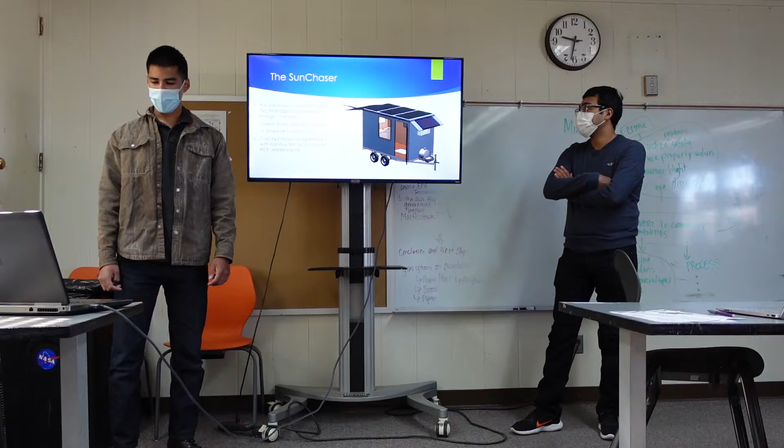Sure. Okay, so as Dr. Ghosh alluded to, 2 summers ago Dr. Ghosh put me in charge of the SunChaser project. So I took it from him and started coming up with the design with the help of some other interns, 2 of whom are here, Frank Maldonado and Yazbeth. And this last summer they were here to help me with finalizing the design of the SunChaser. So I'll talk a bit about that, and then we'll also talk about how we handed it off to Brad and ACE High School and how they're actually going to be making it.

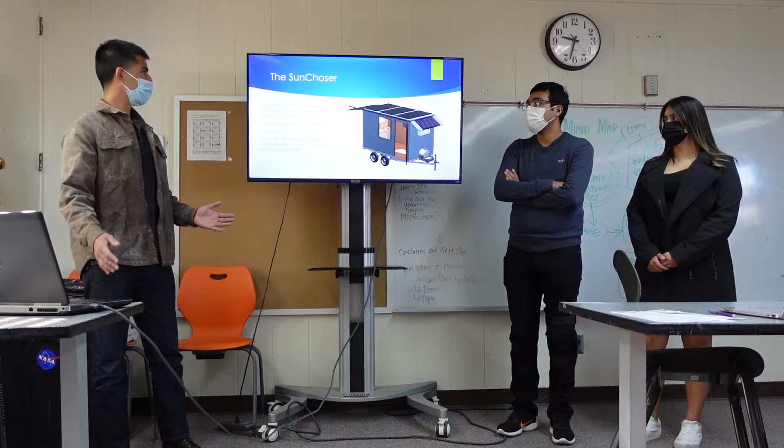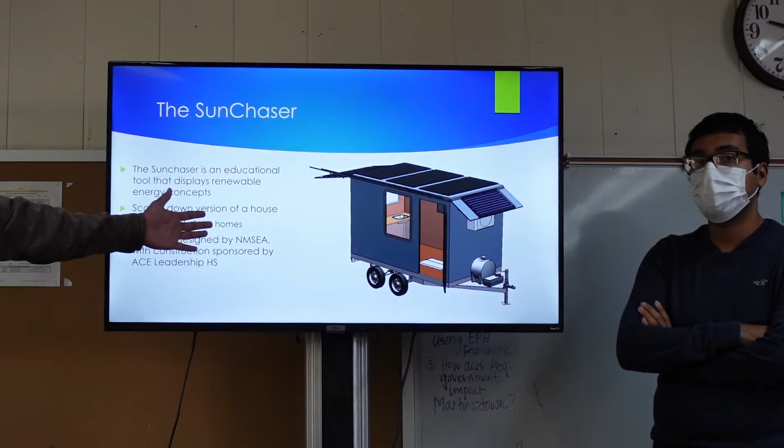So based off of what Dr. Ghosh said, the SunChaser is an educational tool, a mobile educational tool specifically. It's built off of a trailer, meant to be a scaled down home so that we can drive it to different schools and different places across New Mexico and the US, so we can display a variety of renewable energy methods, which you can see in the next section. So this here is a rendering of the solid model, as we call it, that I made on the computer to show the design that we were trying to make. And then in a bit you'll see the physical mock-up that ACE has been making.

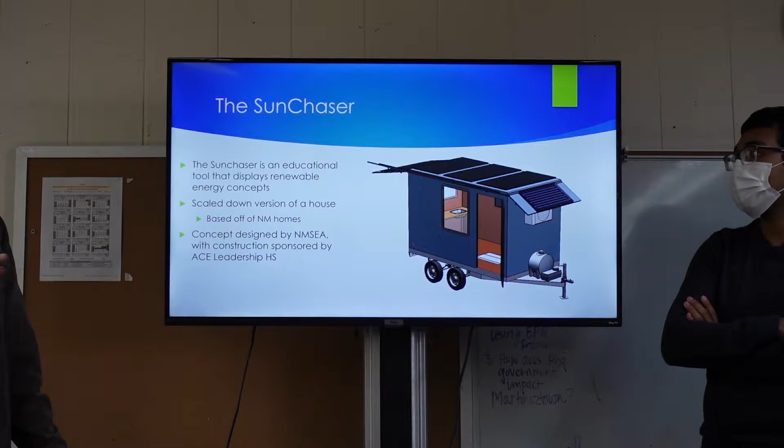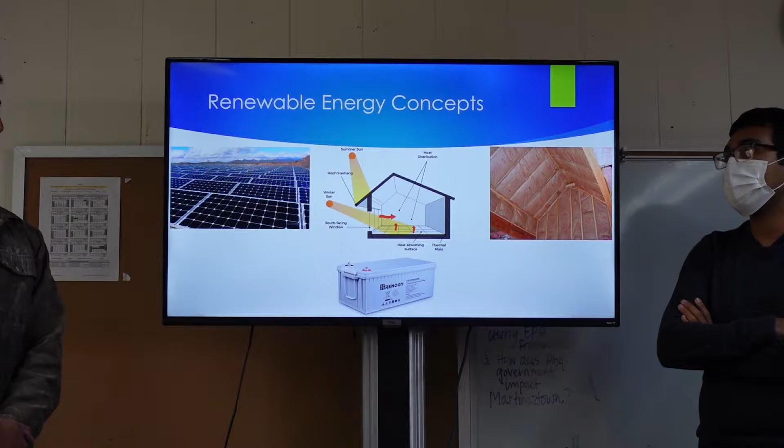So in terms of renewable energy concepts, there's a variety, but what's most prevalent for New Mexico really, and what we have over many states, is that we have an abundance of sunlight. So one of the main things we're focusing on is active and passive solar energy. Active being things like your photovoltaics, your solar panels, and your battery systems, where you're actively generating electricity. I'll talk about more of that in a moment.

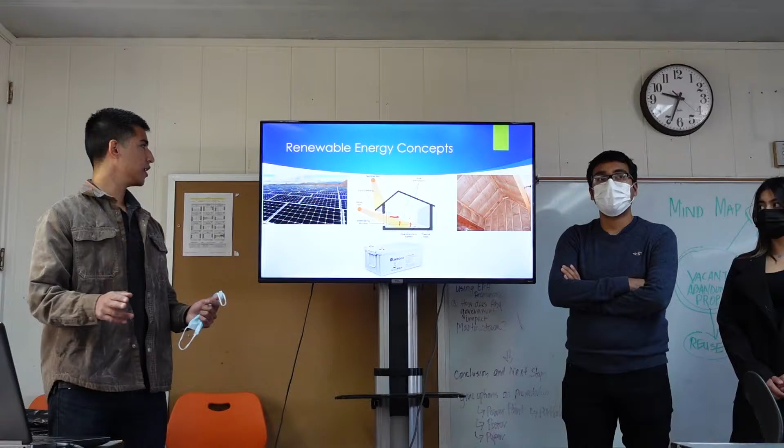And then passive solar architectures, where you utilize things like awnings and windows to allow sunlight in or block it from being inside the structure to heat or cool your building. So I'll talk about that here in a bit. In terms of the SunChaser itself, we designed it in a manner of having a variety of subsystems is how we looked at it. We called them subsystems.

So first there was the trailer platform, and that's what we're actually building off of. We could build from scratch or we could start with a box trailer. I'll talk about all these in further detail in a moment. Second is insulation. That's one of those things that's forgotten very often in renewable energy things, because it's easy to forget that you can generate all this electricity, but if you don't have good insulation, it all goes out the walls, out the doors, out the roof. So it doesn't help much.

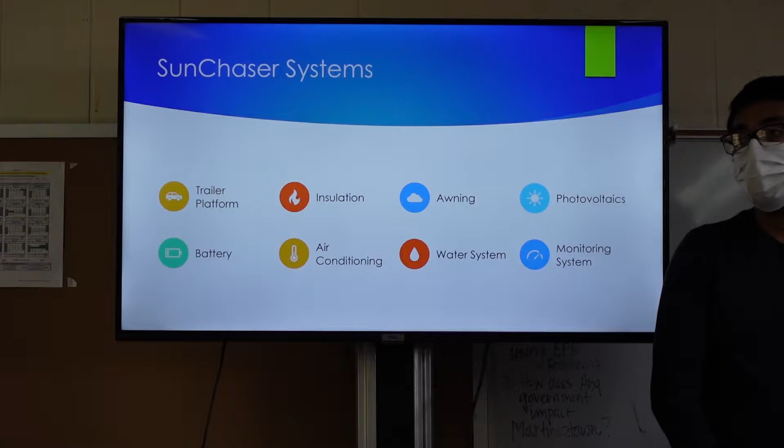Then there's the Awning Subsystem, which is part of that passive solar architecture. Photovoltaics I discussed, batteries, that's active solar, air conditioning, water. Air conditioning, that's one of the major draws for homes; the air conditioning always takes the most power usage. So we had to include that for a scale model.

Then we have a very interesting water system that I'll go into some detail with. And lastly, a monitoring system for effectively making the whole SunChaser a smart system. So it'll be very interesting. We'll talk about that here momentarily.

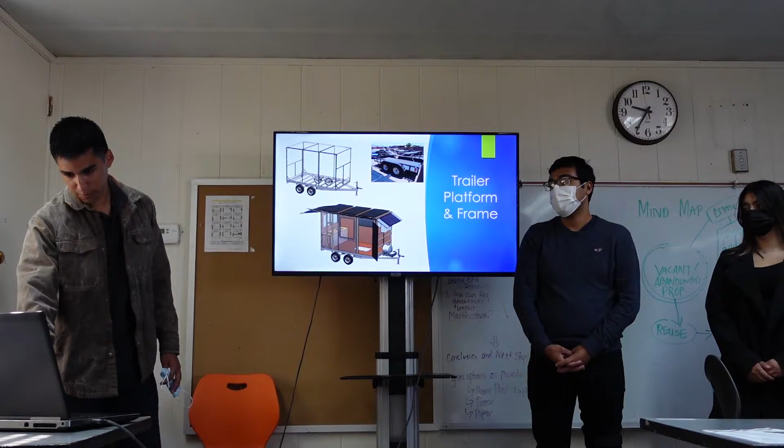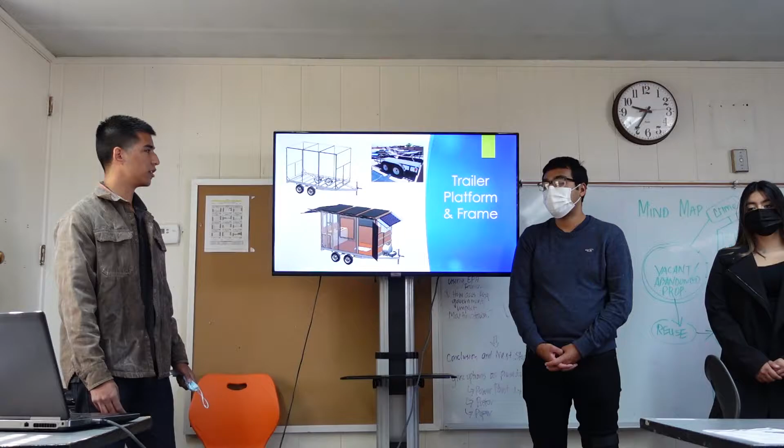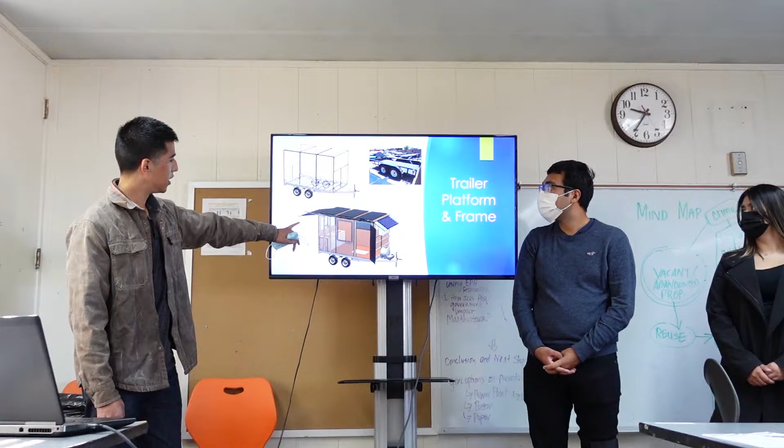So in terms of the platform, and you'll see more of this when we go outside with ACE, we started off with a flatbed trailer and essentially decided that we will build an enclosure off of that, because starting with a box trailer would be a bit hard to adapt in some ways. So you can see here the steel subframe we designed, as well as this view of the inside of the trailer, where you can see some of the wood framing we have there as well for the walls. Very similar to a house is how we designed it. Of course, on a much smaller scale, but that's essentially what we have.

And then you can see the interior, and it's meant to be just like a home. We have our sink and our air conditioning, and then TV, and we'll have other appliances not shown because I didn't model everything, but that's most of it.

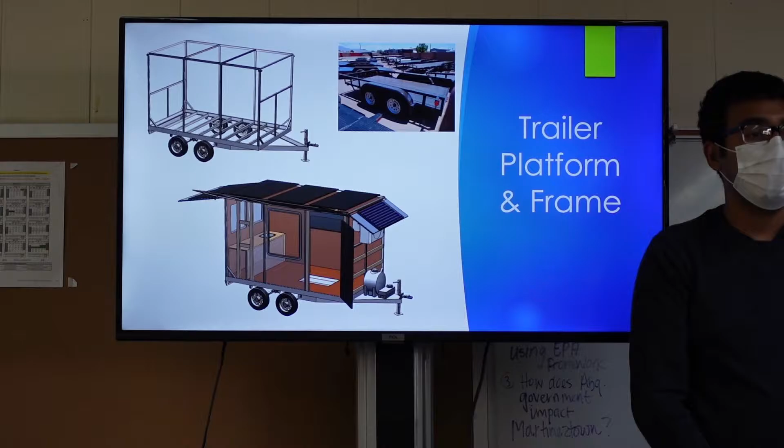So the trailer was, of course, the starting point, so we had to get a good trailer. We were stuck with having to work on what we could physically pull. The old SunChaser was unbalanced and heavy, so hardly any vehicles outside of like a 1-ton truck could pull it. So this is meant to be much lighter and easier to pull, to the point that you could pull it with a Highlander if need be. It shouldn't be much of an issue. Next, Frank will talk about insulation. This was one of the subsystems he was finalizing in his time this summer.

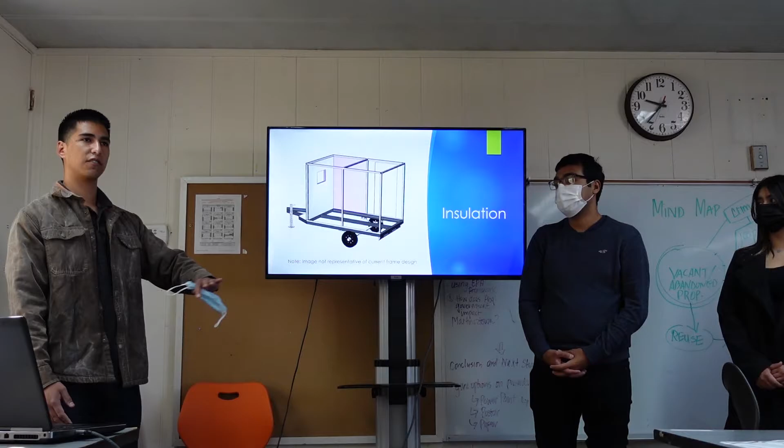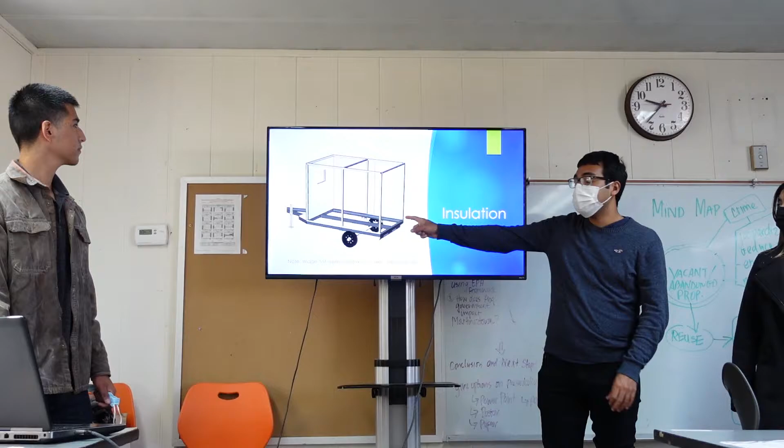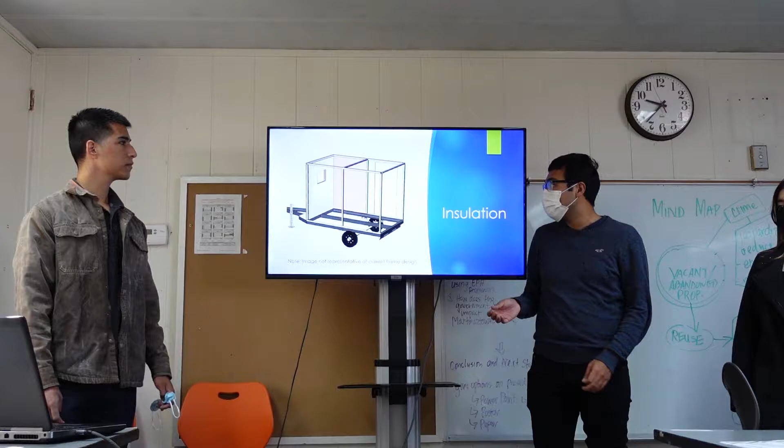So as Gabriel mentioned, insulation is actually one of the most important parts of the SunChaser, especially because these walls are only 1.5 inches thick, and because of that thickness, it allows for more heat transfer through conduction. And so for this wall thickness, we need about an R7 to R9 insulation value. And foam board is actually perfect for that because it has those R values at those thicknesses. And there's also a few more considerations we have to make.

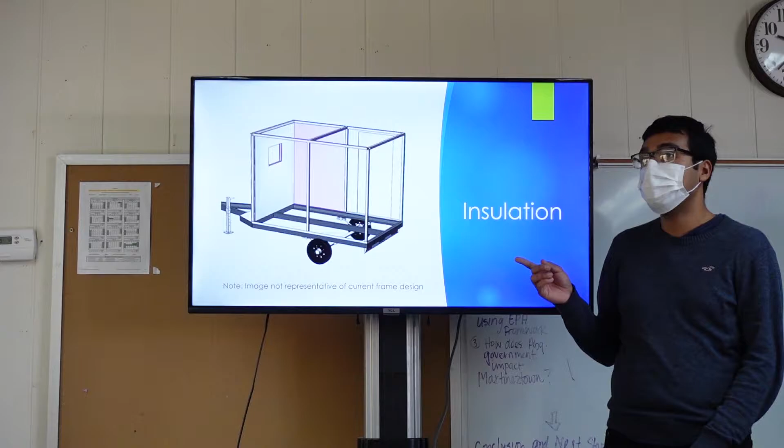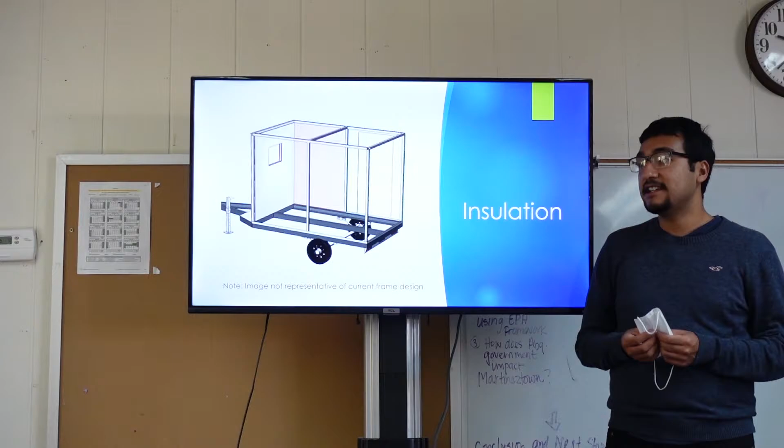The outside of the SunChaser will be aluminum, which is highly conductive, about 200 watts per meter Kelvin. So that will be transferring a lot of heat in the cold and in the heat. And also, the interior of the SunChaser is plywood, and that is, I guess you could consider it an insulator, as it has a conductive value of 0.12 watts per meter Kelvin. Next slide.

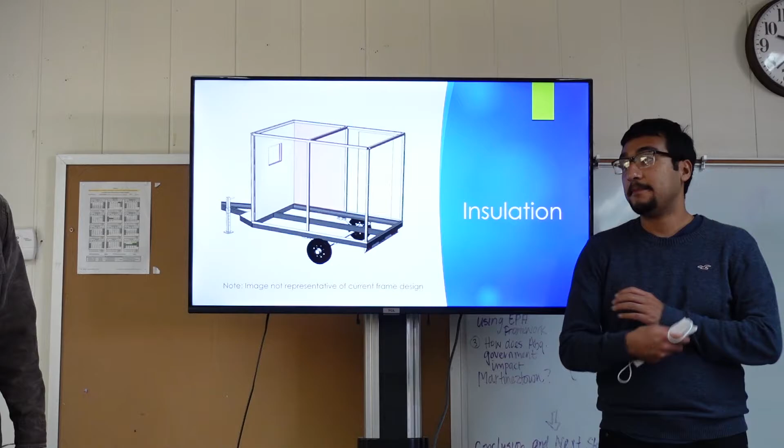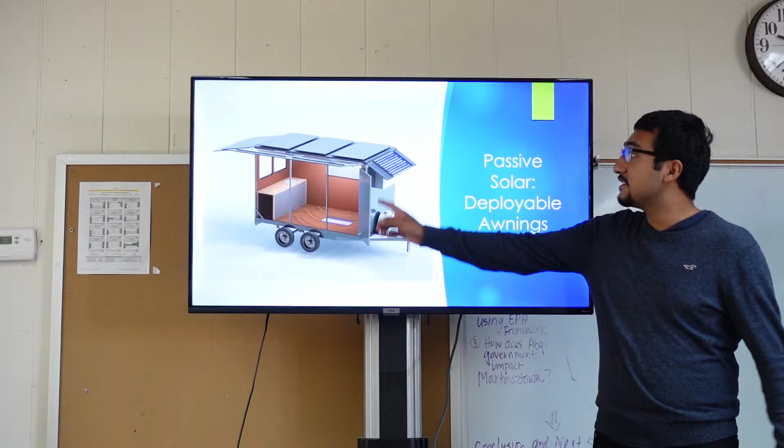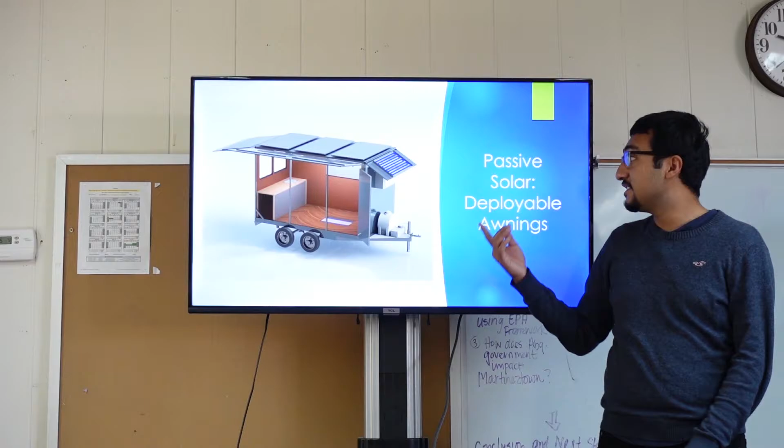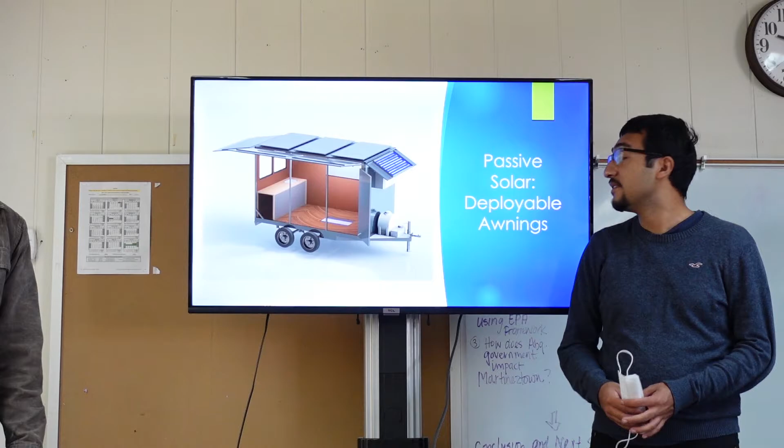Okay. Yeah, and as Gabriel mentioned, we will have these deployable awnings, and these are not only for shade, but also they will hold some solar panels. So this front awning will actually hold 2 solar panels, and the back one will hold 1 solar panel. And these will be completely controlled by linear actuators, so their position can be completely controlled. And the smart systems that Beth is working on will help track the sun so that the solar panels are in the required position for maximum production of power.

Next slide. Then a little bit more specific into the awning frames. This is the larger awning on the side of the door. It is made by 1 inch by 1 inch by 14 gauge, which is 83 thousandths of an inch steel. And so one of the design considerations we wanted to make is that we wanted to include a factor of safety of 1.5. And this awning should hold about 120 pounds; with a factor of safety that is 180 pounds. And that is what I have modeled here.

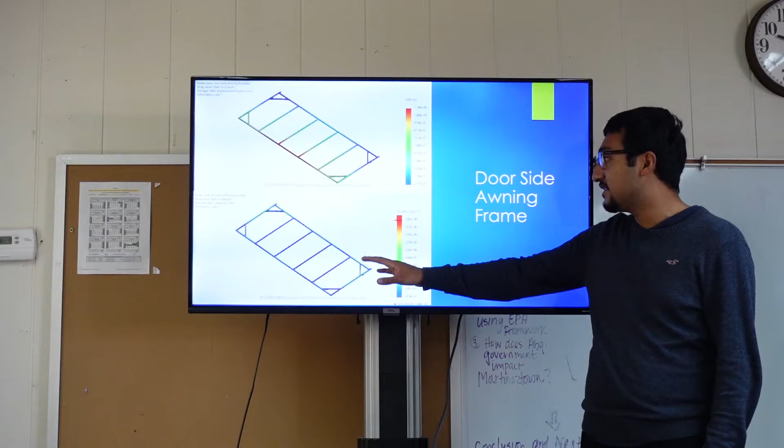And so if you see the maximum displacement at the edge here is about 1 inch, which is relatively small, and there's also no yielding. You'll notice that there is a little bit of yellow, but it is mostly blue, signifying that there is no yielding at all, that this frame should work perfectly under the loads.

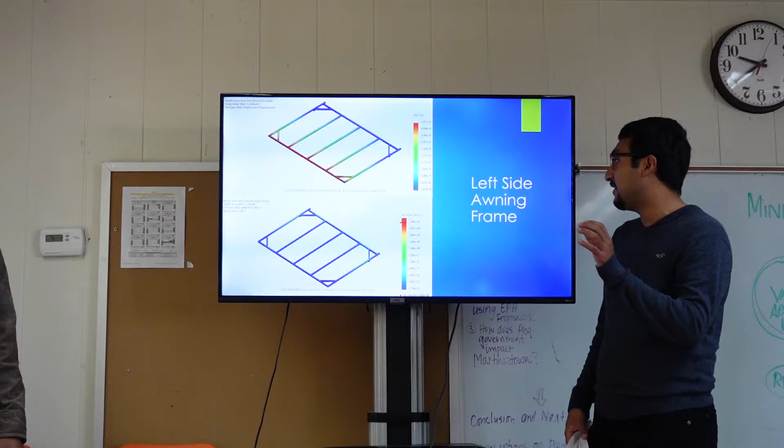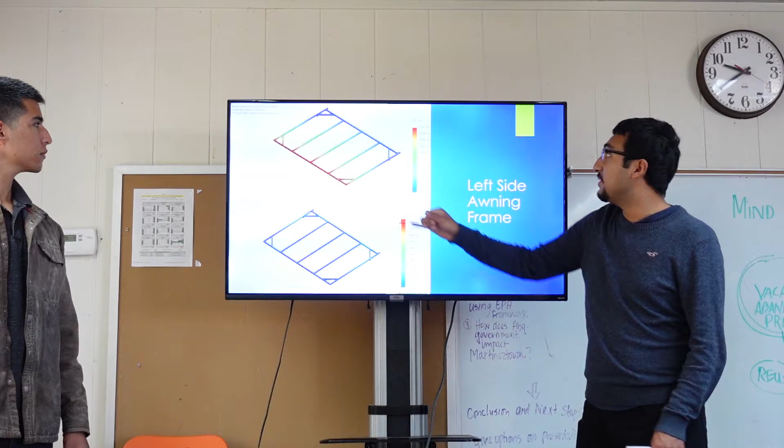Then here we have the left side awning, and this one will actually hold one solar panel, which is about 60 pounds. So with the factor of safety, it'll be around 90 pounds. And so here we see a similar displacement at the edge of the awning frame, but this time it's around half. It's about half an inch. And once again, there is no yielding. It's a relatively cool plot here, and it should be able to sustain that load. But now Gabriel's up next.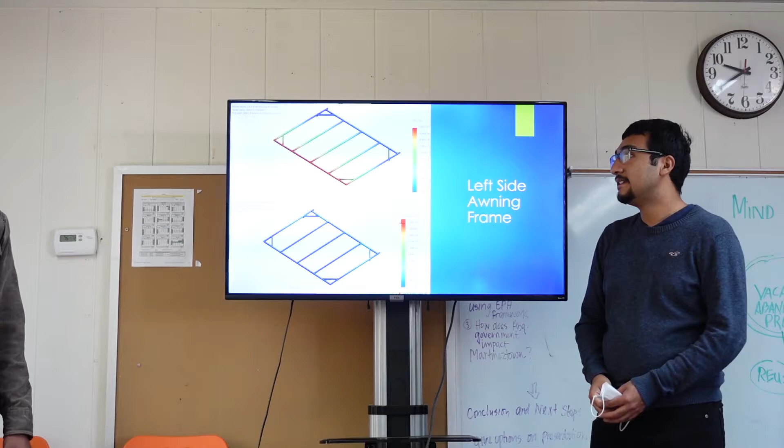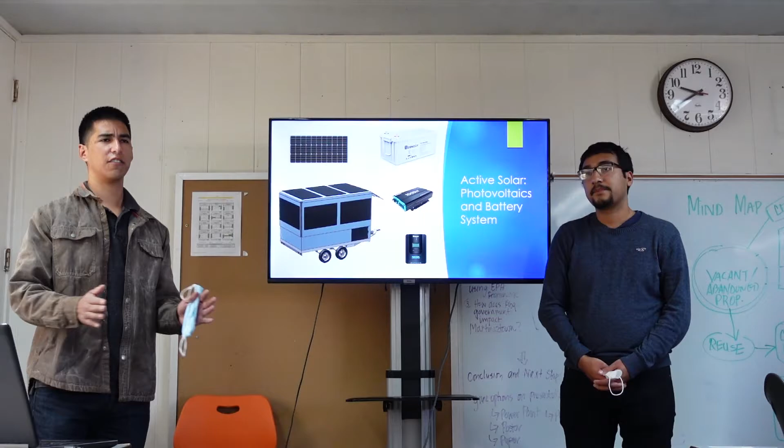So with that, as Frank alluded to, we have designed the SunChaser from the ground up to be able to fit all these solar panels and to do so in as efficient of a manner as we can. It's something that is beneficial for houses, but sometimes if you're not building your house completely, it'll be hard to get that many solar panels. But what we wanted to do was kind of show the best we could possibly do in that respect.

So you can see here the SunChaser model has the awnings folded down. So the awnings are great, and I'll talk about that here actually. When they're folded down, that's when we're in travel mode or storage mode for the trailer, for the SunChaser. And then when it's time we take it to, say, a school to present, we'll hit a button, as Frank alluded to, and the awnings will pop up with the linear actuators.

Or if we hit a different button, we'll start the sun tracking mode, as Frank talked about, where the awnings that are on the trailer will be able to track the sun. And Yasbeth will go into that momentarily. That's what she's been working on. Overall, photovoltaic systems have been fairly simple for the last 30, 40 years. Generally, you have what's called your photovoltaics panel, which is your solar panel, as everyone knows it by. And that is what takes the sunlight and makes it into electricity for us.

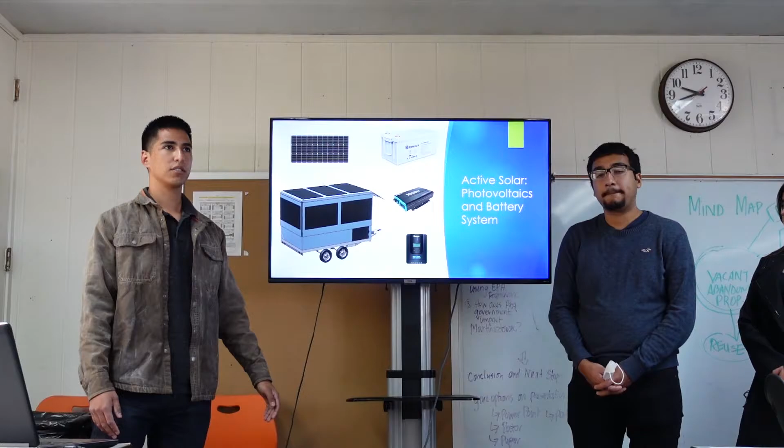That goes through what's generally called a charge controller. It basically takes that electrical output from the panels and makes it something that the battery system can digest more easily. So that electricity goes to the charge controller, to your battery bank, and your battery bank is where you hold all your energy. So the battery bank is what we plug everything into. And we say you can attach an inverter, because the battery bank is in DC power, and if you need AC like your house, then you need an inverter to convert that to AC. So that's about what we have for that.

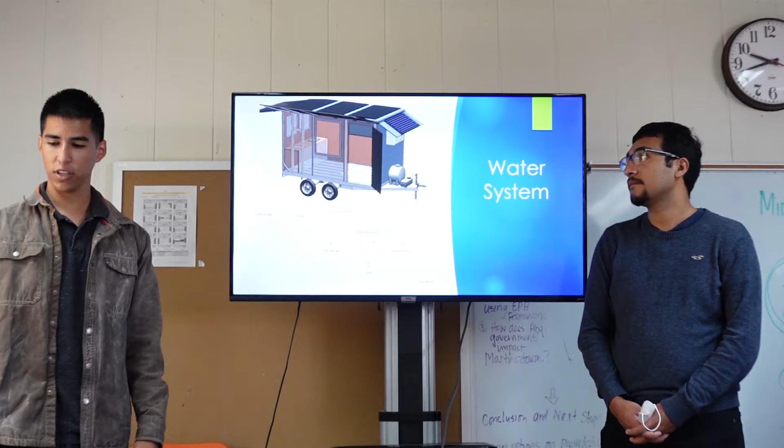In terms of the water system, this is one of my favorite systems actually, because it's one of the most involved, I suppose. Essentially what we're having is we have this panel up here, which is meant to represent a solar water heater. So we have a way to heat water and have hot water on board the SunChaser. And actually we have a diagram of the general plumbing flow chart that explains it a bit better than I might be able to.

But essentially what we're doing is, dependent on the temperature outside, we want to be able to use that hot water to also heat or not heat the inside of the trailer. So we have a radiant floor system that will be doing that. So dependent on the temperature, also part of the smart subsystems, which we'll talk about, we'll be able to divert water to be stored either in the exterior storage tanks or in the radiant floors.

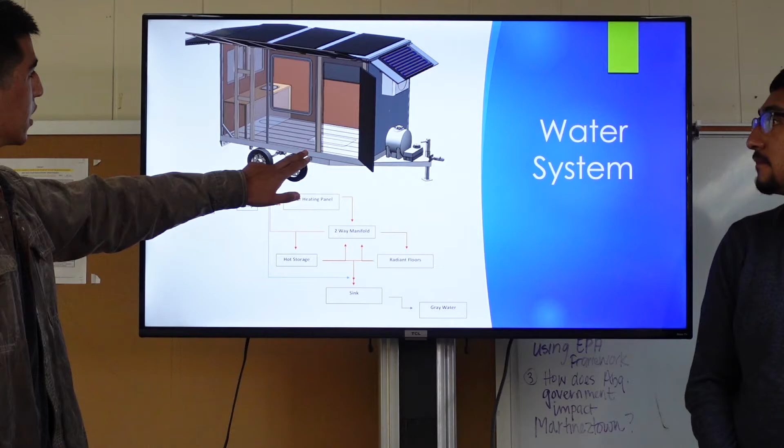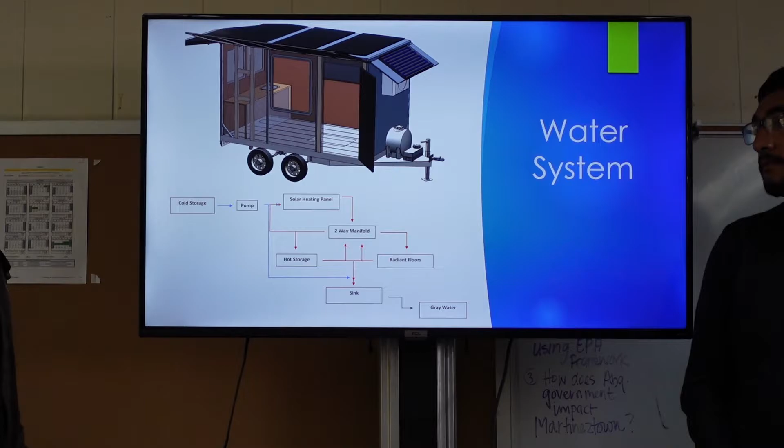Then when it comes time to actually using that water for washing your hands or whatever it may be, it'll go towards the sink and you can use that hot water. So that's a very interesting system. That leads me into what Yasbeth can talk about.

Yes, so my name is Yasbeth, and as Gabriel has mentioned prior in the presentation, the goal is to make the SunChaser a smart system. We have recently started working on actually creating these subsystems, and we have broken it down into 3 main groups for now. The first being the awnings, which is coding and making a small-scale model of the linear actuators that are going to be moving the awnings to whatever position we'd like, whether we want it to be completely flat down for travel mode, maybe 45 degrees or 90 degrees up.

We also have the solar tracking group, which is the portion where the solar panels will adjust to whatever angle the sun is hitting it the most. That way it can convert the most energy and bring it into the SunChaser to use for other purposes. And then the last subsystem that we're going to work on for now is the cooling and heating system, which Gabriel just finished talking about.

The main goal for now is to create small-scale models, work on the coding, and make sure it's working. That way, when it comes time to transition into actually implementing these subsystems into the SunChaser, it's just a matter of editing the coding here and there, and that way we can troubleshoot everything and make sure it works. Slide.

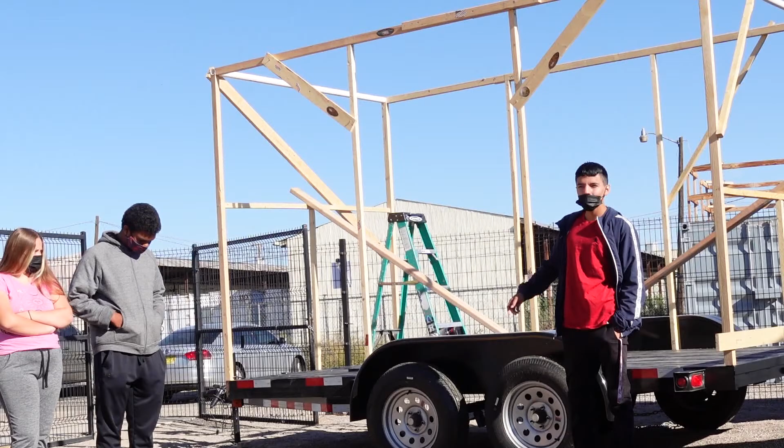Right now you see a wooden mock-up. I want one of our students, Samuel, to talk about that. Why are we doing this? Hello, my name is Samuel Cabrera. I'm a student at Ace Leadership, and this is a mock-up of the NMSEA trailer, our solar energy trailer. And we did a mock-up because it helps us practice our measurements, practice our building, and practice with the solar energy and how it's gonna look.

And also, we have a couple of braces to help the trailer be stable, and some of our pipes would twist so it won't break. And it took us about a week, 2 weeks to make this mock-up, to put our materials and our cut list together. And we had a few changes in our cut list because of the windows and the different sizes of wall. And the trailer wasn't the same size as the blueprint, so we had to make it a little bit shorter.

That's good. I'm going to ask Enrique. Thank you, Sam. I appreciate that. Enrique, I'd like you to address one question.

What has been your biggest challenge with working on this? My name is Enrique Sanchez, and the biggest challenge on working this project is actually trying to get it not over 1/16 of an inch in the project, since we can't make the measurement over, so it can actually fit in the trailer. And that's the biggest challenge I had in this entire trailer. Working with the precision required and the accuracy. Yes.

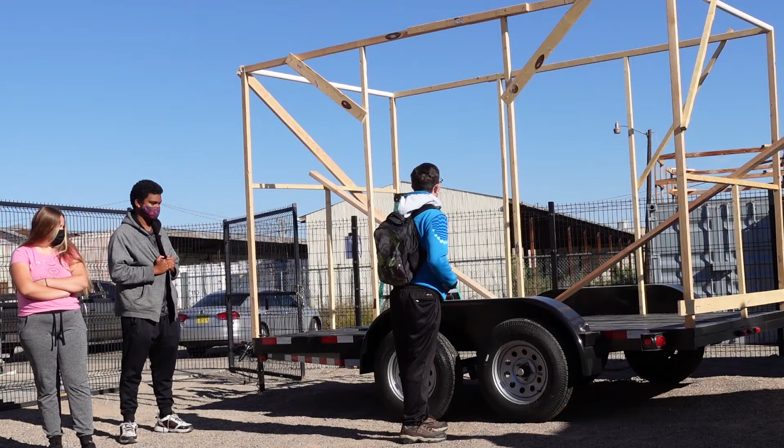Honestly, I think one of the coolest things about this is that even in high school, we're learning how to actually weld. My grandpa actually tried to teach me this stuff when I was only 7, but I was too scared because of all the lights and all the sound. It was scary at first, but now that I'm 17, 10 years older, it's much better, and not to mention that I'm actually learning it from people I know I can trust.

So once again, this is phase 1. This entire project will take the entire school year. Phase 1 is the structural elements. Phase 2 is closing it in, getting the insulation in. Phase 3 is installing the systems. The students will do all of these. Over the summer, I worked on the curriculum closely with other educators, and we ended up breaking down the curriculum into 3 main parts. The purpose for this is for whenever it comes time to take the SunChaser to schools and classes for students to learn about.

The 3 main groups that we broke it down into are elementary, middle school, and high school. Each class will have a lesson accommodated to their certain grade, but every grade will have an objective, which was created from state curriculums. We made sure that we cater to the grades properly and to whatever knowledge the kids will have at the age that we're teaching them at. They will also each have an activity. For example, they will all do a scavenger hunt relating appliances that they use at home, energies that they see all the time, and things that we can convert into solar energy. However, it will be a little more advanced as the grades go up.